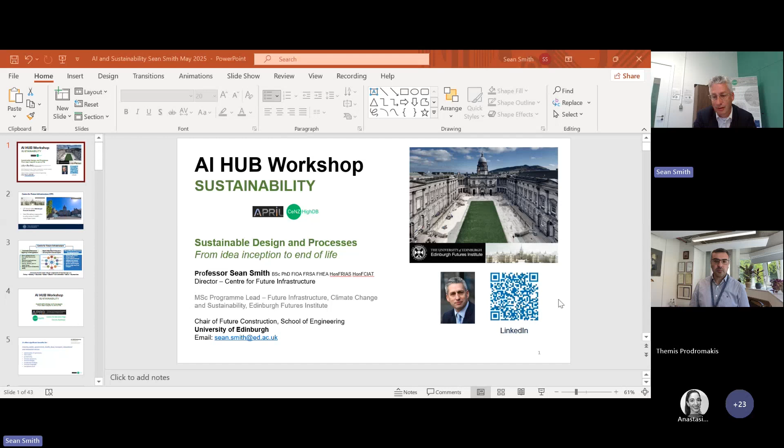That's great, super. Okay, good afternoon everybody, on what is still a very sunny day in what has been incredible weather. Themis asked me to do this talk, and I said, Themis, I'm not an expert in AI. He said that's not an issue, Sean, we're interested about infrastructure, about the aspects that AI relates to and where it's going. So with that in mind, and the hat of sustainability, I'd like to take it from the design right through the process, that golden thread, and how we think about everything from idea inception to the end of life of a product, system, building, or infrastructure.

Just a bit about ourselves. We're the Centre for Future Infrastructure, based in the Edinburgh Futures Institute. The EFI's role, like many institutions across the UK, is to look at many of the world's major future issues and challenges and try to solve those. Specifically with EFI, we have a strong focus on interdisciplinary approaches, how we can link the Futures Institute across our 22 schools and 100+ research centres and institutes. Our centre covers a whole range of areas, but with infrastructure, huge elements around construction, but also right down to product design and thinking about circular economy from that very start, that very inception.

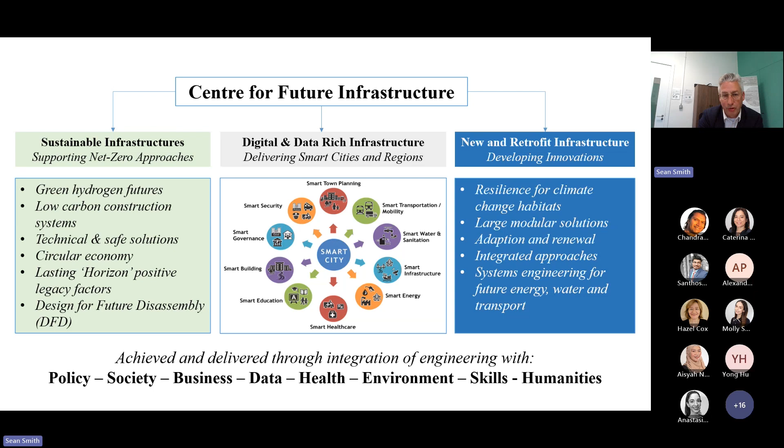It's a wonderful world to work in, very challenging also, with a range of policies and other aspects. My thanks to the APRIL Hub. This is a joint presentation supported by April and also our new centre, the Centre for Net Zero High Density Buildings, which is funded by UKRI. We partner with five other institutions: Glasgow, Strathclyde, Napier and University of West of Scotland, amongst other organisations such as our National Innovation Centre here called BEST, Built Environment Smart Transformation. That focus is really to take some of the real challenges of dense streetscapes, dense buildings, and many historic buildings in our towns and cities, and how we can convert them into net zero delivery, but also take the occupants and buildings with us.

Now AI offers obviously a whole range of significant benefits, and I'm not here to tell you all the wonderful things it does in sustainability across different sectors and its application, but you'll be aware of these: optimization of operations, timescales, the productivity that can be gleaned from AI and the work you're all doing, those opportunities around decision processes, new knowledge, accelerated findings, the common language AI offers globally, and that global reach. These are the things we all know about what AI can do, and many other things. But one thing I'd like to focus on strongly today is where we're going in terms of the infrastructure for AI, starting at the very large scale in terms of the buildings, their cooling, their waste heat, and the energy demands these are going to require.

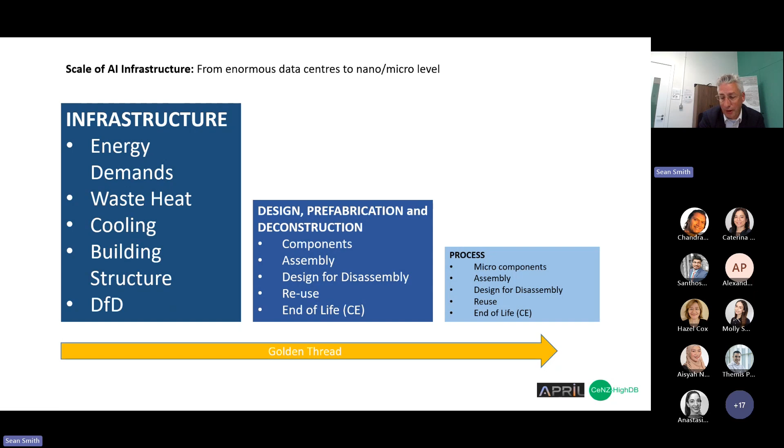So what I want to do today is look at the context of the current environment and the challenges coming ahead, and why sustainability has been rising up the rankings in terms of policy, government and industry. But apart from climate change, there are many other issues going on too which we need to address.

The next 20 years, the world's going to spend roughly about 100 trillion on buildings, transport and infrastructure, and the likelihood is it will be well beyond that when we look at the investments coming down the line vis-a-vis new data centers being planned. The built environment itself is responsible for 40% of global carbon emissions, 30% of global energy use, and consumes nearly 50% of the world's natural resources. So in everything we do, particularly for data centers to support AI, or how AI can support more sustainable approaches for our built environment, becomes incredibly important.

Let's park climate change, which I know is difficult to do, but beyond that, the other thing coming over the next 75 years is global population increase. That's about 3.5 billion increase in population - a medium trajectory increase from the United Nations, not the highest trajectory - but we'll need to build about 2 billion homes.

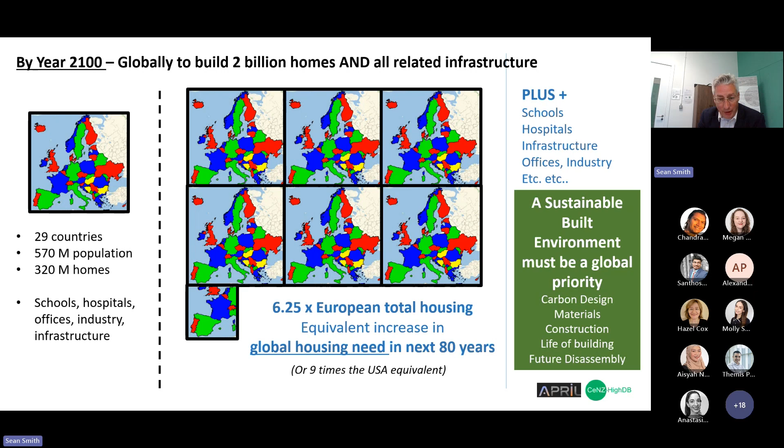Unfortunately, when we look at net zero, we are definitively globally not on track. This is important when we look at where AI is going and the infrastructure that will be required for it. Despite some attempts to improve what we're doing with our zero carbon building stock, we're still a long way off with much, much to do. And the clock is ticking.

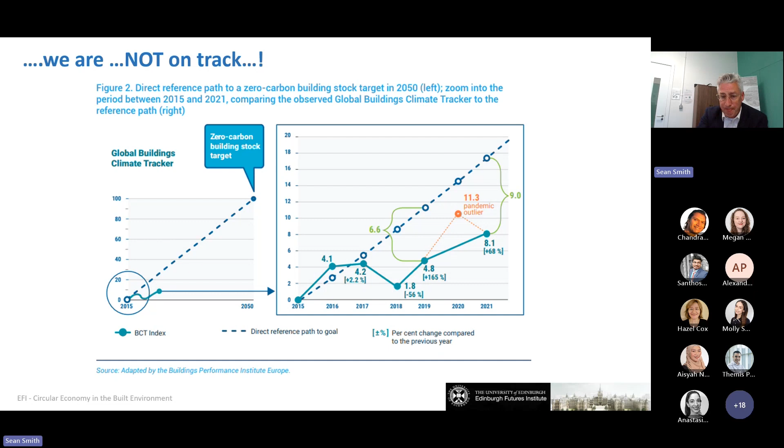When we look effectively at how we could potentially get there, at different pathways to goals, it also seems quite an immeasurable task to achieve this. Hence the significance of so much of what's coming in the AI sector and the supporting infrastructure plays a critical role. But enough of these graphs - they're too depressing sometimes to look at - but they are a challenge to us, and they set the scene for the things we're going to have to do in all of our thinking, no matter what it is.

In addition, when we look at the global floor area of buildings and energy requirements - this is the International Energy Agency - they looked at net zero emissions for 2050 scenarios. As we decrease those emissions across the sector, you can see the red dots represent the increase in billions of square meters of floor area of buildings that we will be building over that 30-year period.

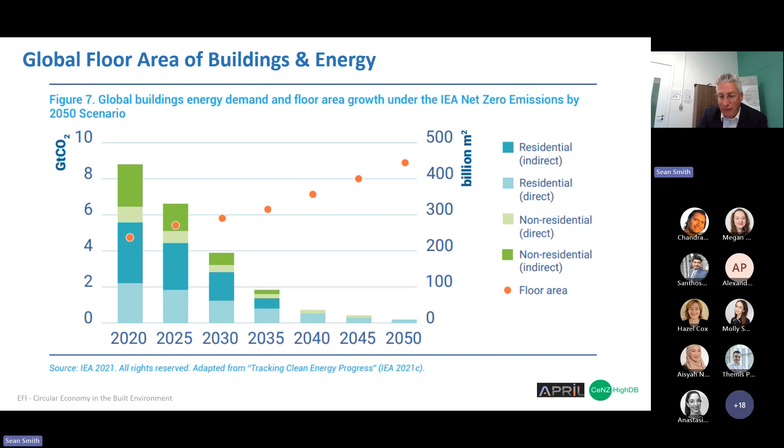So a staggering amount of activity and work required, all calling on resources, all requiring energy in some shape or form, whether it's for warmth or coolth, which we'll come to shortly. But nevertheless, when we think about sustainability in anything we are doing, when you step back and look at the huge big picture around the world, it is a significant challenge. But we academics and researchers in industry, we like challenges.

So if you've not seen this before, this is very commonly the process that we use around the construction sector when we're looking at products and construction stage, when something's in operational use, when we approach its end of life, and then we look at the benefits beyond the building life cycle or the asset life cycle, its reuse, its recovery, etc. And one thing that's fundamentally important here is that something is not shown in this typical journey, maybe because we just take it for granted.

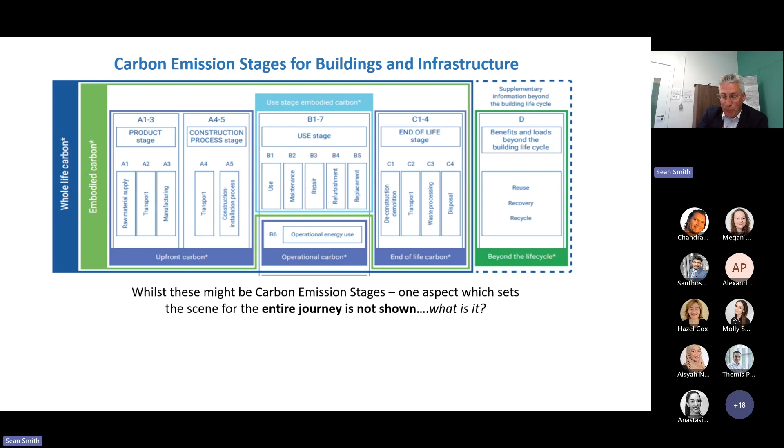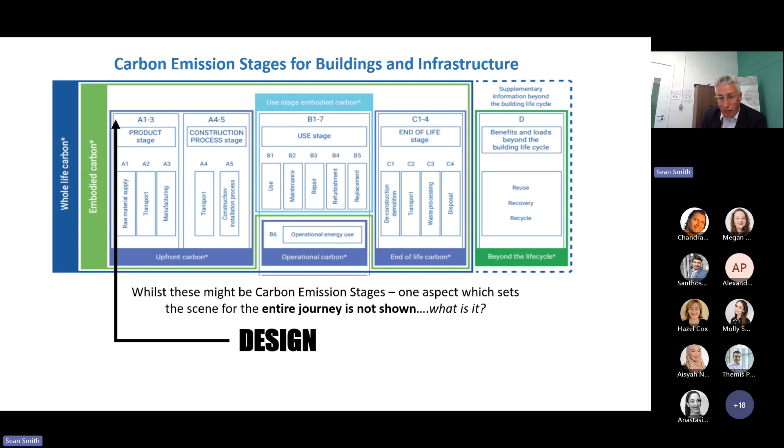But the most important thing that happens here when we look at carbon emissions on any plan of stage of product or construction is what happens right at stage zero. What happens in that design? Because that dictates so much of what's to come, whether it's an individual product, micro nano component, right through to large scale infrastructure. And therefore we need to give that much more attention.

And even when we design an asset, whether a product be, or could it be a large infrastructure or building, it doesn't matter that we just consider it at that point when it leaves the factory. We have to consider its life journey, how we will replace it, what's the maintenance, how often. Are we designing the components in our circuit boards, for example, that they can be easily replaced and we can design for deconstruction and reuse all of those materials and those components?

In construction, we've had to do this for a significant number of years. We've got a lot better at it. Okay, we're dealing with very large items, but at the same time, we've also designed in many attributes within products which allows us to reuse and recycle more easily.

And this is because the whole sector really was, back in about 2003, 2006, hurled into, as it were, their responsibility of what they need to start doing for sustainability. So when you're looking at sectors, probably the construction sector has been at this for the longest period of time in testing and developing. It's still ongoing, which forms new R&D, it supports new innovation.

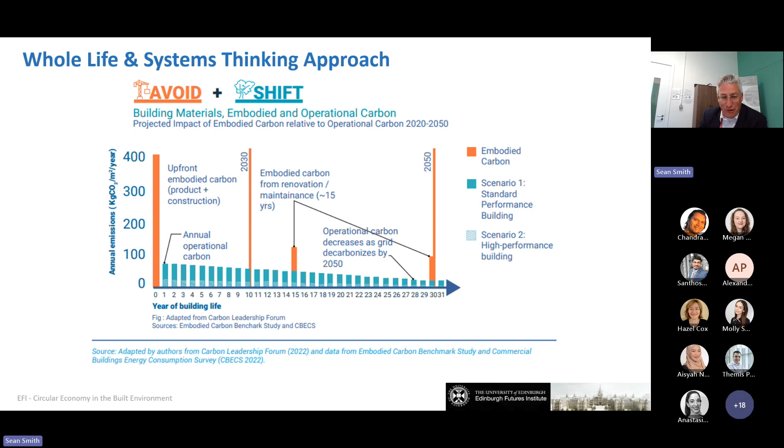But nevertheless, the challenge is still there. And when we look at global CO2 and we look at the CO2 equivalents and our circularity, we often focus on the operational carbon, understandably, because operational carbon is the predominance of how we look at net zero. But it's that embodied carbon in the materials, that growing importance. And where will those raw materials come from that we need, and can we recycle them sufficiently?

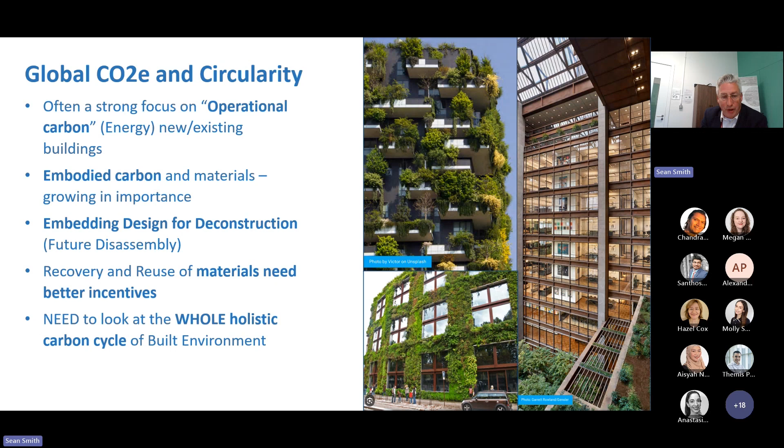And are we embedding design for deconstruction, otherwise known as design for disassembly, in the future of what we're doing now? So are we thinking about our future generations and how we will deconstruct and reuse these materials? And how do we incentivize the recovery and reuse? But importantly, no matter the sector, be holistic in all our thinking.

This is quite typical of the circular economy, sort of circularity gap reports. This is the one for Scotland. And what's very interesting in it at that time, but this was just about 3 years ago when this was published, of course, data centers didn't feature. Yes, it covers all sorts of things like millions of tons of energy and food and agriculture and forestry, and where construction plays a part.

But it would be interesting in 10 years' time if we looked, for example, at the UK or the eastern seaboard of the USA, where some of the big data centers are going in, and we start to look at where was the energy and material consumption input, where was the export, where was that going to? But they're very, very useful diagrams to give an idea of the flows of materials and our interlinks.

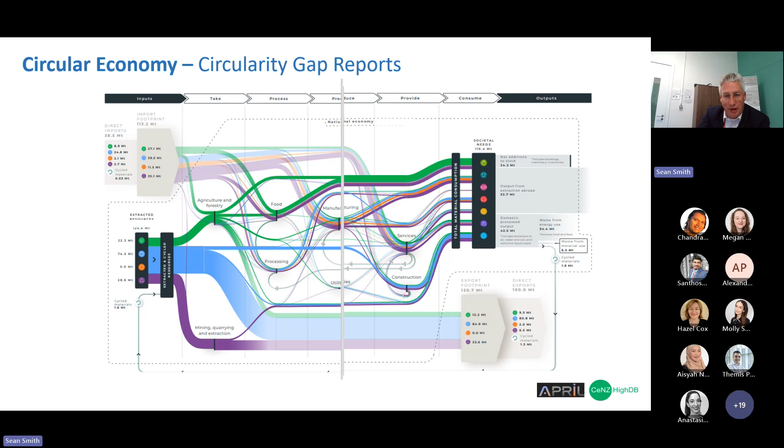Just one final thing. Construction is often blasted as being terrible for its waste. And on the left-hand side, you can see in the pie chart, we've got household waste. So this is the waste streams, for example, that are going to landfills. About 21% in Scotland of our landfill is from household waste, way down from what it used to be, but nevertheless, there's still some. 28.3% is commercial industrial, but just over 50% is construction and demolition. And everybody sighs and just gets very desperate about the situation.

But actually, when you break the data down, and this is where data becomes important, is actually 73% of that 50.7 is in fact soils. Because as we move soils across construction sites, as we regain brownfield sites and we put and reuse sites for new housing or other things, which was industrial land, we need to cover it with soil.

And so when you dig down into the statistics, that soil has to actually be included within landfill, which seems rather silly, but nevertheless we have to. And the 21% is in mineral waste, so that's particularly aggregates and stone. So between them, 94% is actually materials we're moving around anyway.

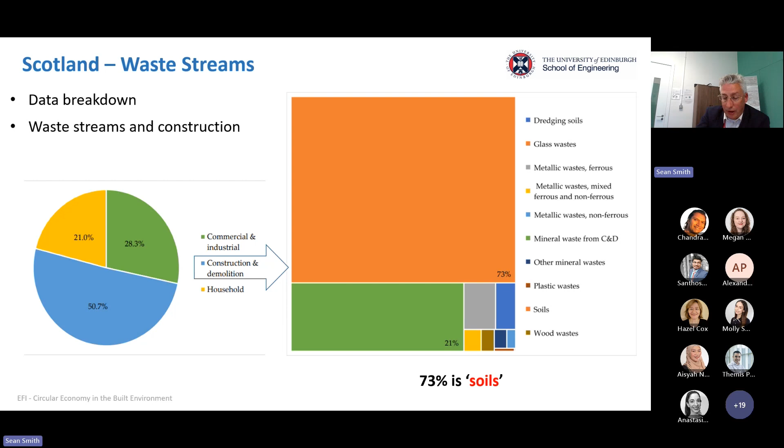That's not to say we take our foot off the gas, but when we're looking at waste streams and we look to the future, particularly the electronic sector and the whole AI sector of where that's going, then it's very important to look at data.

And one very important document you must read, if you've not read it already, is IWA 42. This is the Net Zero Guidelines. This will become an ISO. It's an IWA at the moment, International Workshop Agreement. It was led by the British Standards on behalf of the ISO committee to develop a common net zero guidelines. And it's tremendous in terms of the direction and pathway, and that will move from an IWA to an ISO. So please have a look at that if you're working in this field. It's very important.

The number 42 I thought was rather interesting. They chose that number, and I did challenge the British Standards. Why did you choose 42? They didn't give me a reason, but I wondered if it was anything to do with the meaning of life in the universe, if you've seen The Hitchhiker's Guide, which the answer was number 42.

Anyway, we have a global growth for net zero electrification across the planet as we remove our fossil fuels. And then, well, along came AI data centers. And when we look at some of the reports, some of them are here. I've put links to all of the reports, and I think we're going to be able to share the slides after today. So please access all this data that's there from these reports.

For those that have seen the IEA report on energy and AI, it's fascinating when you look at the data center electricity consumption and household equivalents of some of the largest data centers that are being planned. But the great upside of data centers and where we're going to need to put them is they're very close to urban centers. And that creates a number of benefits. Of course, it's had a lot of headlines in different areas, but specifically around electricity and energy and how much we will have to use. So I'll let you read these at your own discretion.

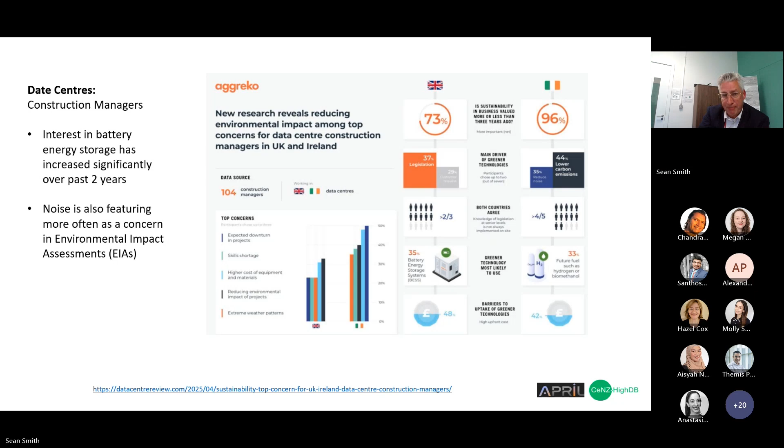When we look at the building sectors across the globe and we look at electricity demand in itself, you can see the annual change in electricity consumption by sector for buildings between 2023 and 2024 has been shooting up, much more than industry or transport. This is electrification as we switch from fossil fuels into more electric use, but specifically, much of this has been driven by the power and requirements of new data centers and also some of the severe heat waves in China and India.

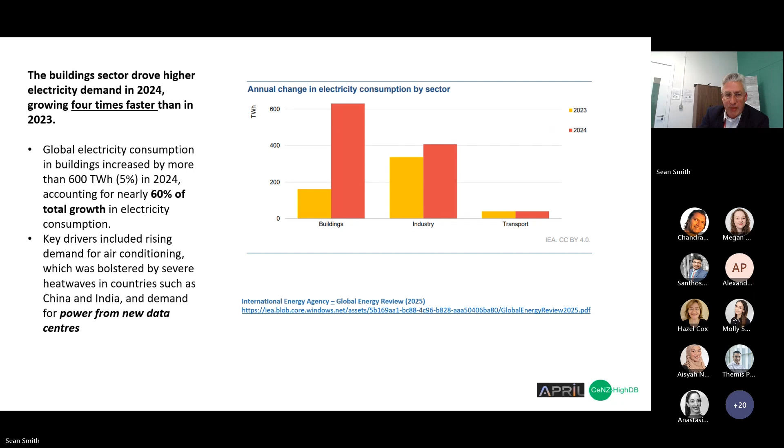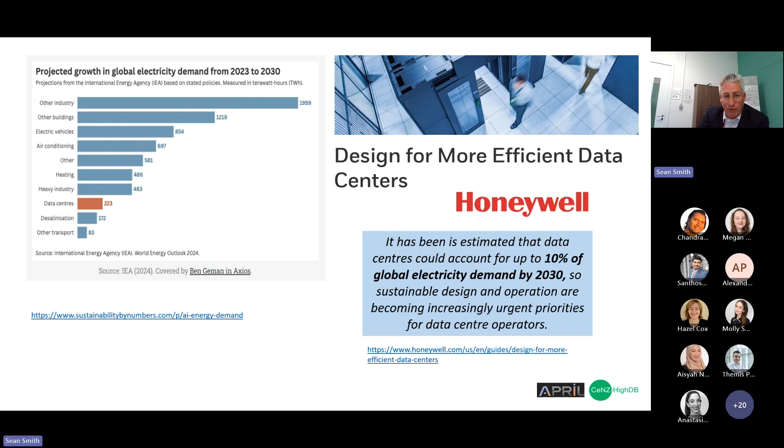Honeywell produced a very useful short paper which looked at where we'll be by 2030. And they forecast about 10% of global electricity demand will be taken up by the design and use of data centers. And that is a huge proportion of electrical power that's going to be taken by them and used by them. So it's incredibly important we get this right. And you've seen all these diagrams before, I'm sure, about the footprints of different search engines and search requests, the energy utilization required. I won't need to go into those, but anything we can do to reduce that would be absolutely fantastic in terms of reducing that energy consumption and being more sustainable.

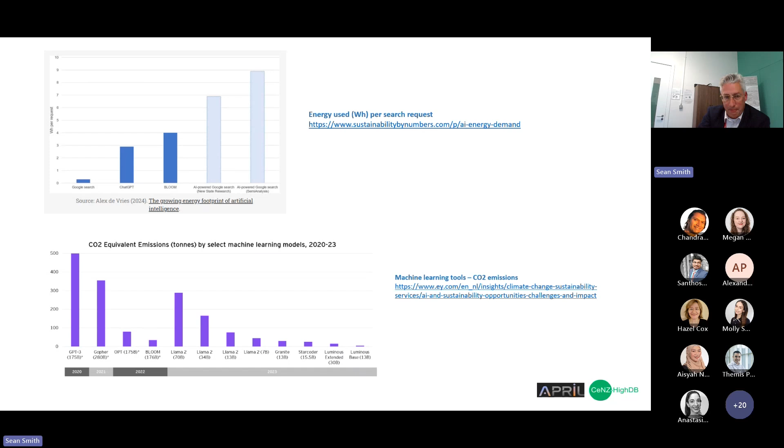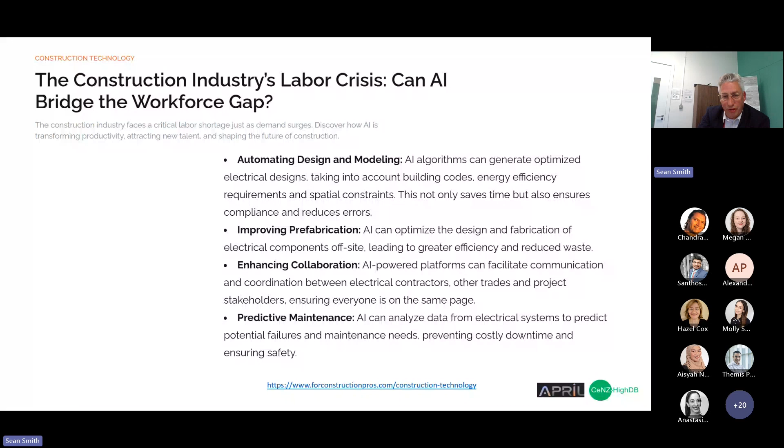But we know that AI is also being incredibly useful across the construction sector already. We're using it in automated design and modeling, improving prefabrication, enhancing that collaboration, and also in predictive maintenance. And ironically, the very data centers that we're building now, a lot of them are actually using AI in their design to help maximize and optimize the approach. So some real benefits coming there in how we approach the sustainable agenda using AI at the design stage.

One of the biggest features of AI data centers is the heat and the waste heat. And there's a number of things we can do with that. Some of these you'll be aware of already.

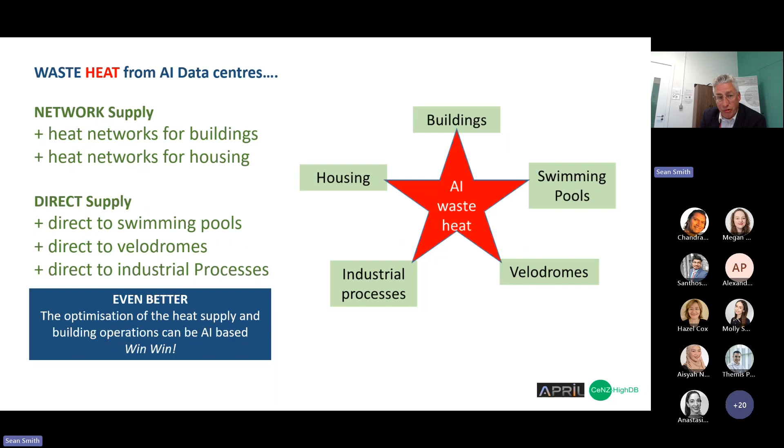We can plug and play that waste heat into what we call networks, such as heat networks for buildings or heat networks for housing. We can also do direct supply, such as direct to swimming pools, velodromes, or directly into industrial processes. And even better, we could optimize that heat supply and the building operations, which can be AI-based. So it's a win-win on two fronts. And we're going to come back a bit more to this later.

Of course, there's a double burden when we look at what's happening with AI, and particularly the data centers with the amount of water usage that's also required. So we have a dual challenge across two fronts, energy and water. Now we can lean into that change. We can change the liquid cooling technologies which are utilized. We can use air-cooled systems where possible. And if possible, we could use the existing water-based cooling systems, but by using the water that's recycled or reducing the amount of water that evaporates.

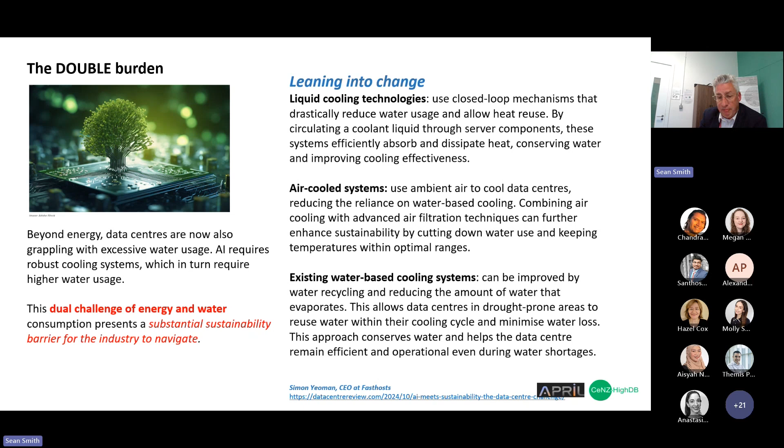But nevertheless, in every dimension that we look at a data center that supports AI, we have to look across the board at all the various measures that we could undertake. And when you think about some of the water shortages which are going on now across the globe, and also the requirements and the demand on water, particularly drinking water in various countries and various developed countries, and the plan that we're actually going to build 40% more reservoirs than we currently have now to put more water into storage, but also to use it for hydropower as we use more renewable energy. The pull and push on water from different sectors will be significant.

When we look at that double push on water and electricity demand, a very good report was done Engineering Responsible AI by the Royal Academy of Engineering, IET and others. And now you can see what's the kind of forecast going forward when we look at the financial years, total water consumption across all operations, but also when we look at the future up to 2050 of that potential spread of projected electricity demand of UK data centres. Huge numbers we're talking about there, up to potentially 35 terawatt hours. Significant demands.

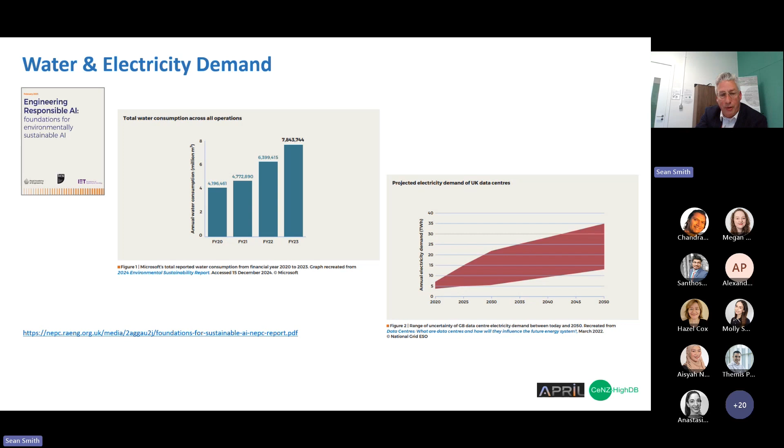So how could we utilise it better, particularly that waste heat? Well, Dublin was one of the first to do this back in 2018 in an area called Tallaght, where the Amazon data centre, which is shown here in orange, was the source of the waste heat. And planning over the lifetime of the scheme and the surrounding developments, they could actually support 2,000 to 3,000 apartments just served on a district heating scheme from the waste heat coming from that Amazon data centre.

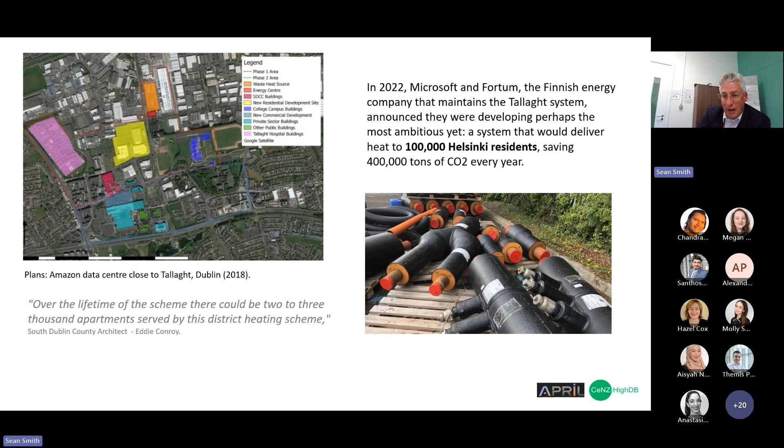And the same organisation, Fortum, who partnered with Microsoft, the Finnish energy company that maintains the Tallaght system, announced they were developing perhaps the most ambitious yet, where they would deliver heat to 100,000 Helsinki residents, saving 400,000 tonnes of CO2 every year by extracting that waste heat and feeding into local housing, which is tremendous.

But it's not just that, and I'm not saying we have to build swimming pools and build velodromes right next to data centres, but if you had a velodrome next door, that's the place to put your data centre. Or if there's the opportunity with swimming pools, because that waste heat can be considerably used in both venues. For velodromes, for example, we need an optimum temperature of roughly 27 to 28 degrees. That track requires a constant temperature, and therefore the potential to use industrial or waste heat from the likes of data center buildings gives a tremendous opportunity for local authorities and municipalities to lower their energy costs in the operations of velodromes, but also in terms of swimming pools.

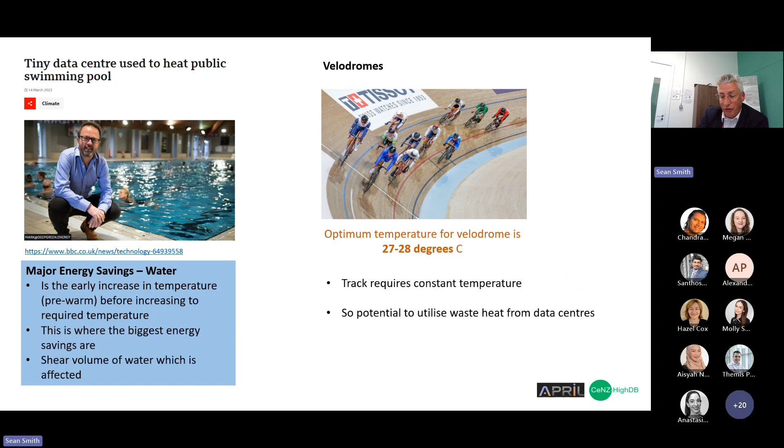And one of the things we sometimes forget is we don't need the waste heat from an AI data center, for example, to get to the exact temperature we need for the swimming pool. What we're actually looking for is the early increase in temperature. That pre-warming, which is done by the waste heat, is where the biggest benefit is gained by using that waste heat to reduce energy costs and energy utilization from elsewhere. And that sheer volume of water which can be affected by that waste heat is just fantastic.

So we talked about warmth and coolth briefly. So when we look at net zero and global futures and needs, about 30% of the world needs warmth, but 70% of the world is going to need coolth.

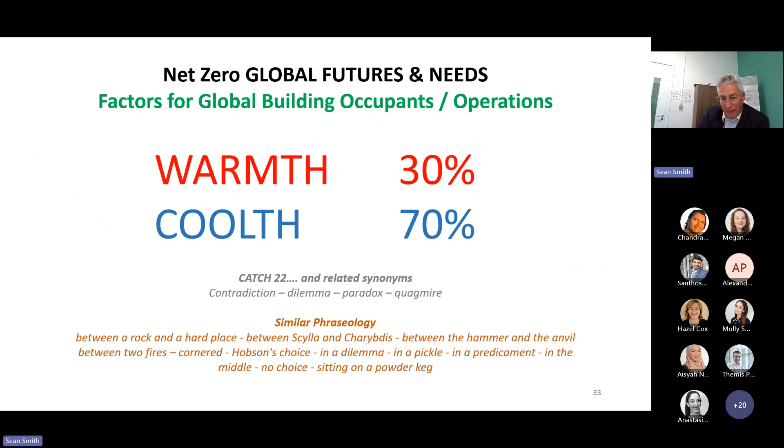And I kind of describe it as the catch-22, which of course is contradiction, dilemma, paradox, quagmire, like sitting on a powder keg, having to address both camps, or in some cases one camp over another, depending on which country you're in, the geography and the environmental ambience that you have to deal with. In the recent periods, certainly up to 2024, the Northern Hemisphere has received some of its hottest summers. Over the past 12 months, the global average temperature has risen, and China has also had major issues, as has Thailand, India, Saudi Arabia, and Mexico.

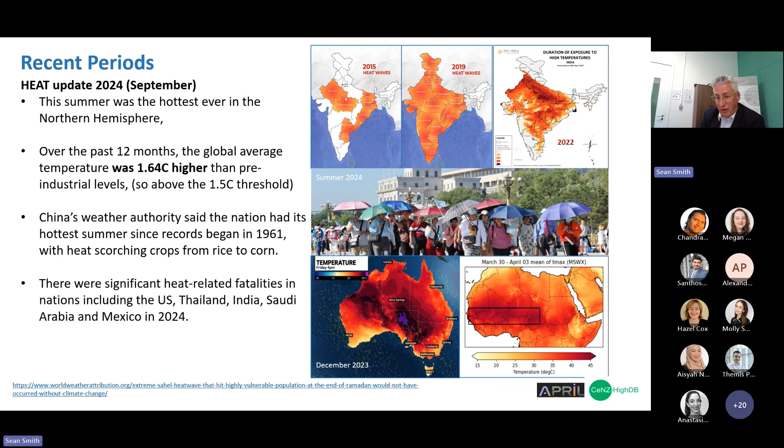And you might say, well, what's this got to do with us? Well, the issue is that all of these major countries are going to require accelerated amounts of cooling, which will pull demand on electricity. And in which case, if we're pulling that demand on the electricity, can we still have sufficient electricity for the planned data centers to support the AI growth around the world that we all thought we would have? And particularly for India, which is very, very tough. 8 of the 9 hottest parts of the world currently are in India, with the specific heat waves that they've had over the last 2 years.

So in that context, when we then start to compare with Europe and we look at trends of where we're going in 2050, we look at the air conditioning demand and the amount of electricity that will be required for that, we now start to think about where would you be positioning most of your major infrastructure for data centers if, 1, you have sufficient power and electricity supply, 2, is it renewable, 3, can it be co-located in a sustainable way with other uses to extract that waste heat?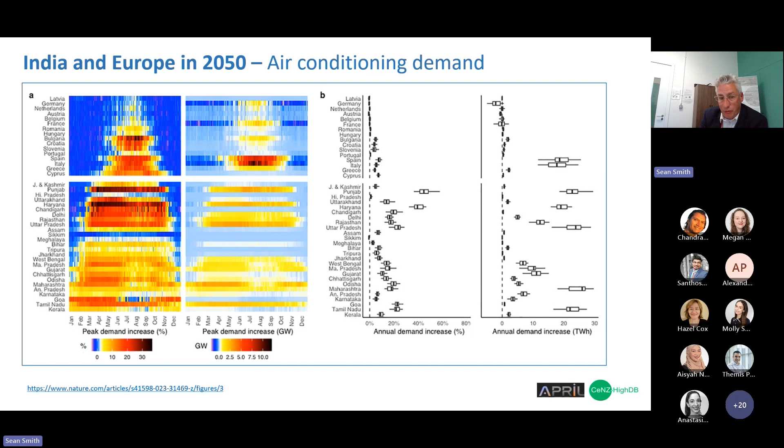And particularly in hot countries, for example, where they require cooling, can we actually extract the waste heat and put that into industrial processes? And so you'll tend to find that in warmer and hotter climates, the waste heat from AI-supported data centers will, in fact, probably go into industrial processes as opposed to housing, etc., which you see in the Northern Hemisphere where it's cooler.

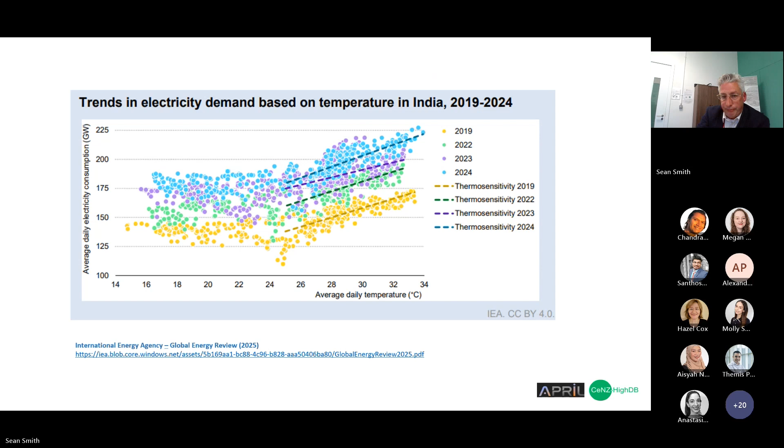And just to give you an idea of India at the moment, the last 4 years of trends in electricity demand, they are significant. And the average daily electricity consumption has been going up consistently year on year as people require more air conditioning and cooling. And then when we look at the capacity of their installed data capacity and the electricity generation mix, there's another pressure. Just looking at that one country of India, you look at the pressures that they will have as they try to push in more renewables and also deliver the expansion. When you've got a country that's going to overtake China in the next couple of years by population, such as India, the opportunity of data centers, that growth is significant, but only if the infrastructure can support it.

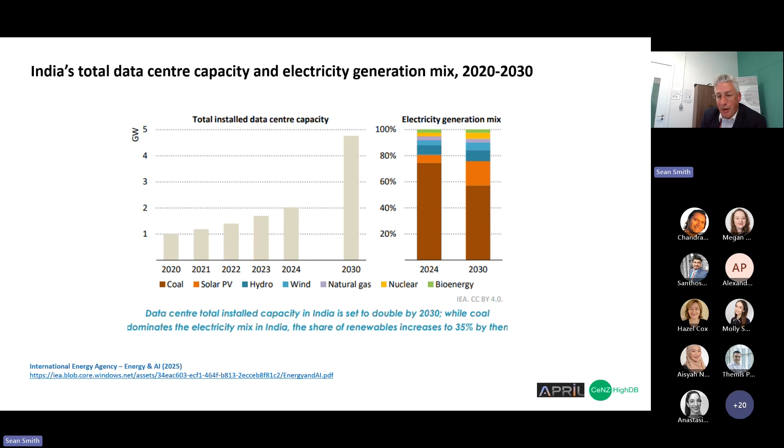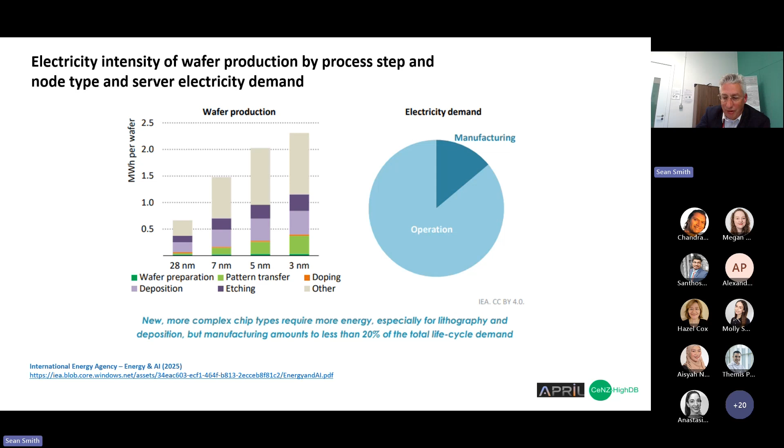When we look at the wafer production for the use in AI and other processes, the micro nanochips, then it's interesting to look at the megawatt hours that are used per wafer, which are quite significant. And of course, as we go down in size of the wafer thickness, we use more and more energy. So in essence, through our own success in the operational support side of where AI is going in the infrastructure, we are creating fantastic new innovations in terms of reduced thickness and operations, but actually we're also driving up the energy utilization which is required.

So finally, I wanted to finish off on a few things about electronic waste. We are seeing electronic waste rising 5 times faster than the documented e-waste recycling. So that means that we really are not succeeding on e-waste recycling. And at a record 62 million tons of e-waste in 2022, that's up 82% from 2010. And we're on track to rise another 32% to 82 million tons in 2030.

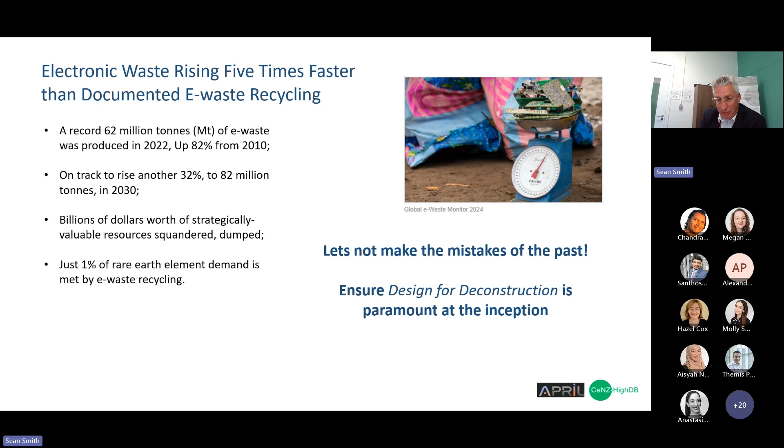So in a sense, we don't want to make the mistakes of the past. As we're designing for the future, from the nano to the macro scale, to support AI and everything that it will need in its infrastructure, let's not make the mistakes of the past. And let's ensure we design for deconstruction, and it's paramount from the inception.

There's an excellent paper here in Nature Computational Science, which was looking at the e-waste streams under different future GAI, that's generative artificial intelligence, scenarios: if we could implement circular economy strategies along the GAI value chain from the design, from the inception right through, then there could be huge savings in that e-waste.

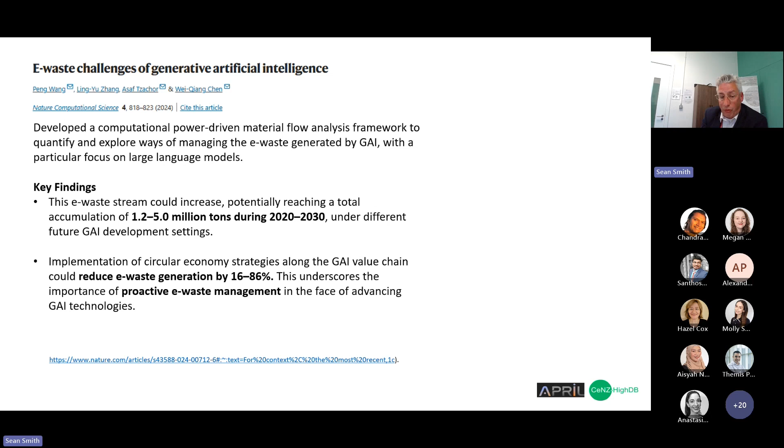And therefore, that kind of underscores the importance of proactive e-waste management, and specifically at the design stage. So I know it's been a run through of many things, but I would leave you with these few words. The AI sector has immense scope through its applications to deliver so many benefits. We're seeing them in the construction sector and infrastructure right now, which is tremendous. And thanks to everyone who's doing that, it's brilliant.

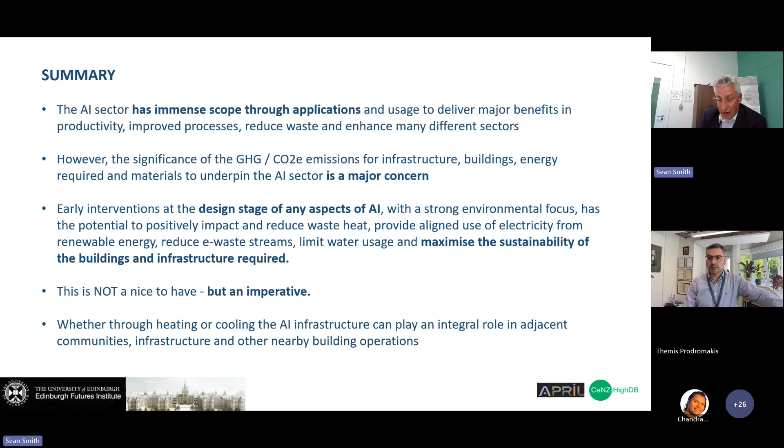But the infrastructure to support AI and all the emissions, energy utilization, water utilization that's required is a major concern. If we can make those early interventions at the design stage on any aspects of AI, then we can maximize the sustainability. And this is not a nice to have, it is an imperative. And whether through heating or cooling or other benefits of the AI infrastructure, there's a tremendous way to engage with local communities where the infrastructure will be placed and support those communities and societies around them.